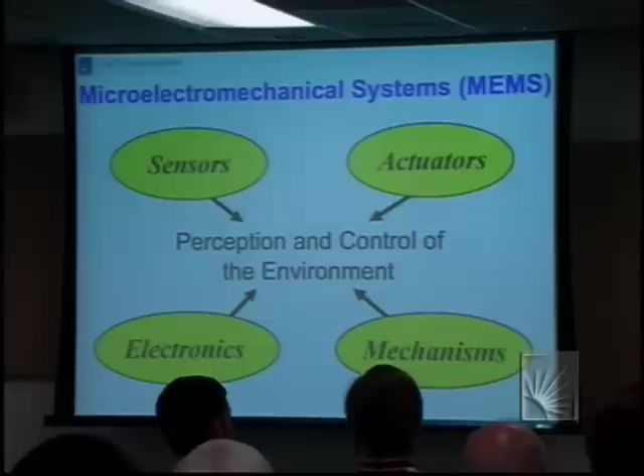Mechanisms is a special jargon word, if you will. A mechanism to a MEMS person is like a fulcrum or a lever—it's not the mechanisms that we in other fields use to describe reactions or theories or things of this sort.

Okay, well, here are perhaps two of the more successful MEMS actuators. I think the projector we're using today almost certainly will have this digital mirror device made by Texas Instruments. It's interesting—the person who pioneered this at Texas Instruments was a Case grad from our physics department.

I've been told many times by TI people that if they'd have known how much it would have cost to develop this device, they probably would not have embarked upon the development. It's now successful and they're making a profit, but estimates run that it costs between $500 million and $1 billion in development costs to develop this bit of hardware.

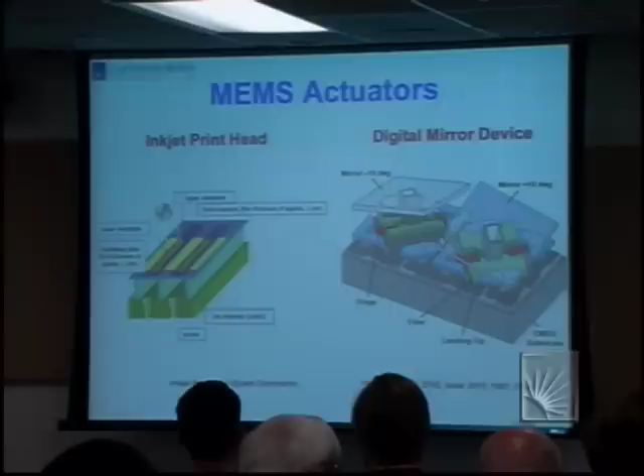It just fits on a chip. In terms of numbers, probably inkjet printers have the largest number of MEMS actuators around, and I'm sure most people in this room would have made use of that today. In terms of sensors, I've got two examples. Pressure sensors are probably the oldest MEMS device, the first MEMS device that became commercial. They're generally simple - there are various versions, but generally with a membrane, you measure capacitance changes, a very typical way.

I'll show this because it's incredibly important. The previous generations of accelerometers, which were used in the early days to activate airbags, were expensive and could only be available in the most expensive cars. It's when these at prices of $5 or $10 came on the market that they became standard in every automobile made. This must have occurred about 10 years ago.

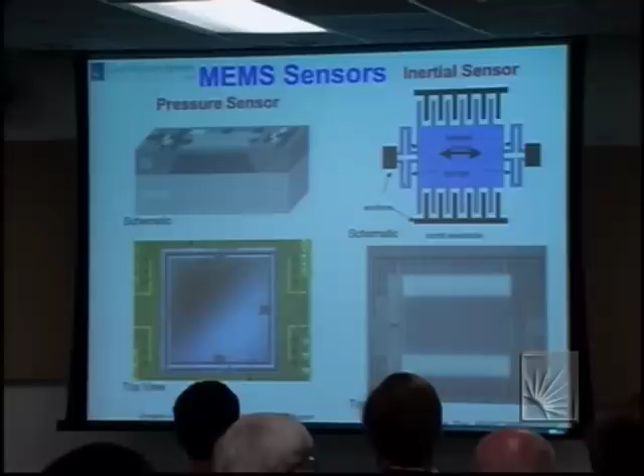I show this and go into a little detail because we're going to use the same type of electrostatic actuation in some of the MEMS devices we have fabricated.

Okay, so this is what I want to tell you about today. Residual stresses - LPCVD is an acronym for low pressure chemical vapor deposition. It's the workhorse tool to make polysilicon. Polysilicon is what MEMS types or electrical engineers will talk about, something that we in material science would call polycrystalline silicon, but the word poly or polysilicon has become so widely used, maybe you all know about it.

These are sometimes really nasty because residual stresses per se aren't bad, but residual stress gradients can be awful and can turn computer chips into something that looks like potato chips. And so we had to deal with that.

However, we found that we can make use of these residual stresses to allow on-chip mechanical testing, and I think that's a really neat development.

We discovered in the last few years - this is work that Joe Payer and I did - that there can be galvanic corrosion occurring during MEMS processing, and I don't believe the electrical engineers knew what galvanic corrosion was really, in the way material scientists know, and realized the detriments in a very standard MEMS processing technique. Okay, these are things I think we have helped the MEMS community with.

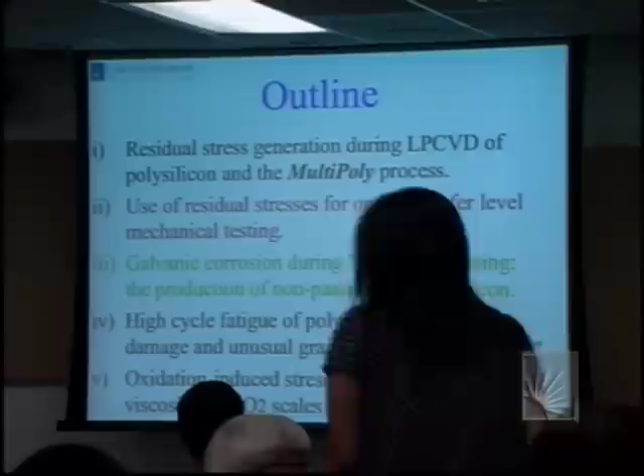And we've been able to use MEMS devices to study oxidation-induced stresses of silicon itself, and some surprising results on the viscosity of SiO2. So that's my outline. I hope I can get through everything in a reasonable time.

There are two types of so-called micromachining - this is again a jargon word. There's, as shown here, surface micromachining, which is an additive technique in that the silicon wafer is just a substrate which supports the device. Bulk micromachining is a subtractive technique - you take a silicon wafer and etch away in selective ways. I won't talk at all about bulk micromachining.

All the work we've done has been surface micromachining using the class 100 MFL just about 100 yards from here. But our devices have all been very simple, so-called single mask devices. We take a silicon wafer, we oxidize it - thermal oxidation to make a sacrificial oxide. Then this is the working bits of the unit.

It's, in this case, LPCVD of polysilicon - I'll tell you more about that in a moment. And then we put down about a micron of CVD oxide, plasma enhanced CVD now, and use this as a masking oxide. We have conventional photolithography and plasma etching, both for the SiO2 and the silicon.

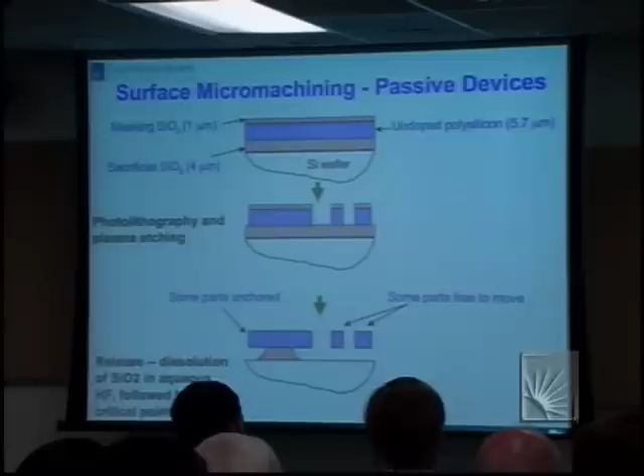And then this would be a cross-section of some device. Over time you use HF dissolution to remove the sacrificial oxide, and you depend on time release such that certain small scale features are floating and larger scale features are fixed, and this allows you to do all sorts of really clever device fabrication. Ours have been simple, but there's a degree of cleverness that I think we can claim.

Well, microstructures are something that material scientists generally think a lot about, and certainly much of my own research career over the years has been involved with thinking about structure property relations in materials, and polysilicon made for MEMS is no different.

If you ever have occasion to work in the MFL, you can do anything you want as long as it's something they've done before. That's fairly typical of any fab. They have very strict rules about what you can and cannot do. Any of you who go in the fab will know what I mean.

Our CVD reactor works in this temperature range of 540 to 620, and you can pick any temperature you like in that range, but not much else outside it. The reaction we use is just the cracking of silane under these conditions. It's inevitable and well known that films deposited under these conditions come down with residual stresses. These are growth or intrinsic stresses, since there's not any real thermal expansion mismatch stresses.

It's curious that at the low temperature end of the regime and at the high temperature end of the regime, the stresses are compressive and of significant magnitude, a few hundred megapascals. But in the intermediate temperature regime, the stresses are also significant, but opposite in sign, they're tensile. It's relatively straightforward to understand the origin of these stresses.

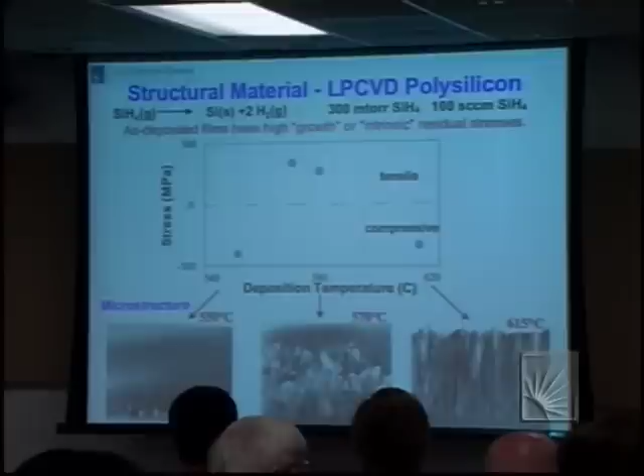You can see this at 570, where under the same growth conditions to allow a 5 micron film to form, about 80 or 90% of the film has crystallized. By the time you get to 615, crystallization is essentially instantaneous. There is no or very small amorphous region, and you get a very familiar columnar microstructure. Very many CVD deposition processes give rise to columnar microstructures. Essentially, you limit nucleation, and whatever nucleates early just continues to grow.

Now, the origin of these tensile stresses is easiest to understand. It arises because there's a small density difference between crystalline and amorphous silicon. Amorphous silicon is less dense than crystalline silicon, so when the material crystallizes, the structure would like to shrink, but it can't. It's essentially fixed. The material essentially doesn't support any plastic deformation at these temperatures, and the result is a tensile stress of significant magnitude.

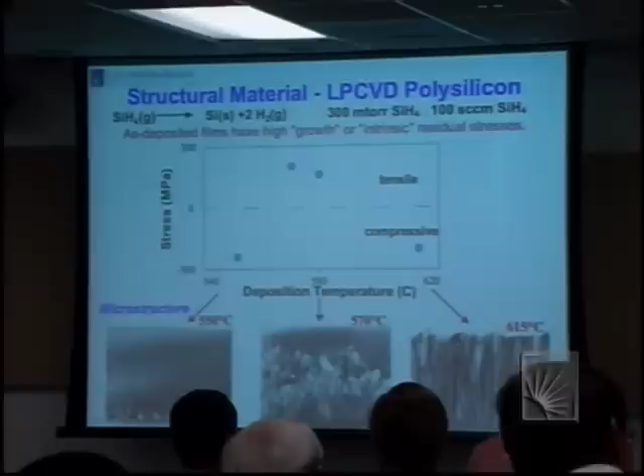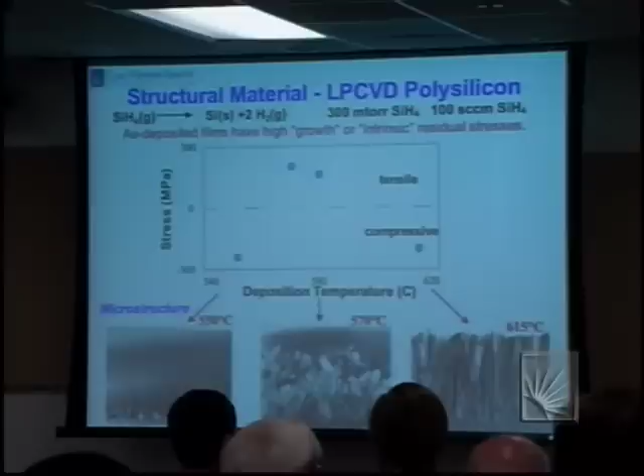At lower temperatures or at higher temperatures, the stress origin is different. It's not as well understood. It's almost certainly a consequence of a non-equilibrium interstitial population. Whether it's interstitial silicons or interstitial hydrogens, we don't know, but if you avoid these tensile stresses, then there's non-equilibrium structures here and here, which cause compressive stresses. Compressive stresses actually are the rule rather than the exception in many different types of CVD deposits.

Okay, well, these stresses can be relieved by high temperature annealing. This is the magnitude of a 550 and 615 deposit and the 570 deposit. If you anneal these, what you see is, let's talk about 570 first: tensile stresses first increase if you anneal at 615. This increase is due to that last bit of uncrystallized material, the last 20% crystallizing by this post-deposition heat treatment.

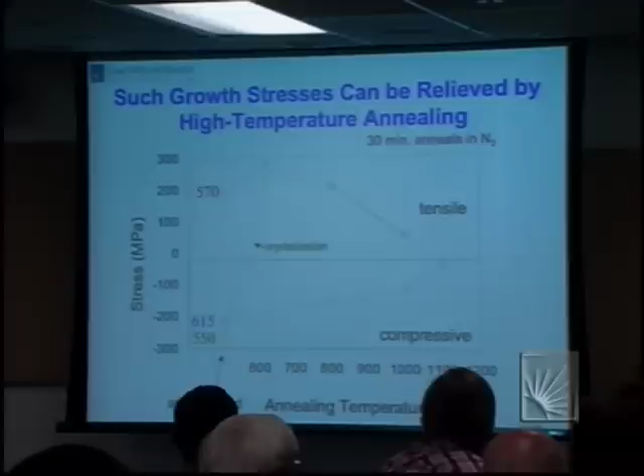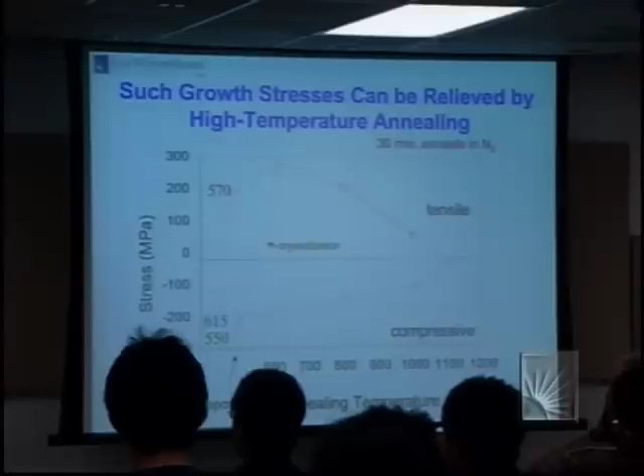Well, just anneal everything? The big deal is there generally are strict thermal budgets, and if you try to make a transistor, you have to be very careful of its structure, and you can't anneal at temperatures like this to get rid of these oftentimes annoying residual stresses. The result is MEMS designers do things completely backwards—they have to build the structure first and then the electronics afterwards. Oftentimes you'd like to build the electronics first and then build whatever structural sensor or actuator on top, so it imposes very awkward design rules. It would be nice if this kind of annealing didn't have to take place.

These are stress profiles of tensile stresses in deposited samples done at a range of thicknesses, deposited at 570 and annealed to crystallize the silicon, and this for compressive stresses. You'll see that it takes a fair bit of deposition until you get a steady state, and in both cases it's about 2 microns. It starts out that you have small residual stresses which increase to the steady state on the tensile side. Compressive stresses, the initial ones are large, and they decrease.

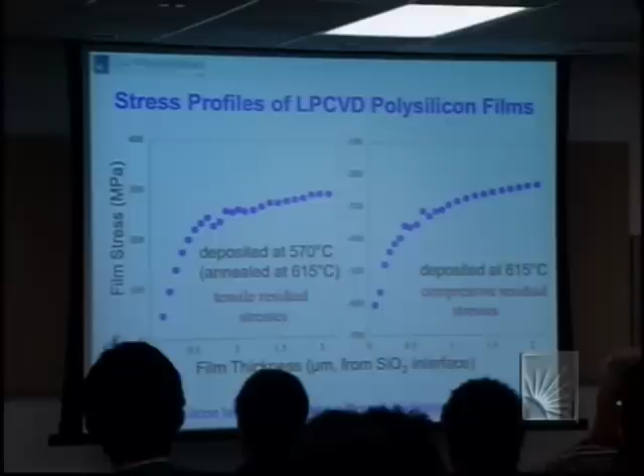In addition to this stress evolution, all these films have through-the-thickness stress gradients, and that's much more significant. These measurements of stresses represent average stresses as a function of thickness, but there are stress gradients in both kinds of films. We had the idea to do this experiment—maybe somebody could kill a bit of the lights.

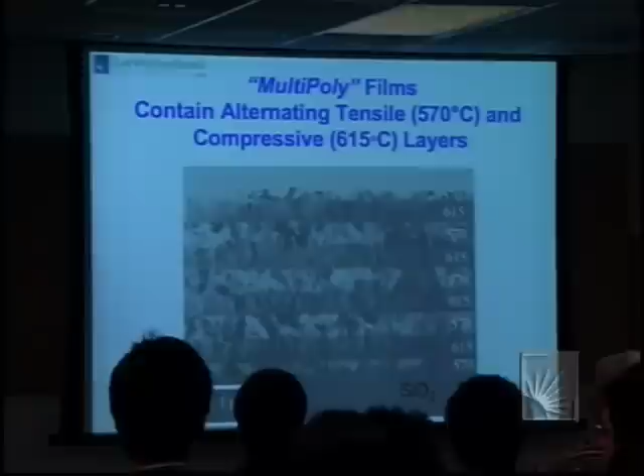So here is the SiO2 sacrificial oxide in which we build the structure. In this experiment, we deposited a thin layer, about half a micron, at 570, and at this thickness it remained amorphous during that brief deposition time. We then raised the temperature and went to 615. During the 615 deposition, the material deposited at 570 crystallized. Okay, so far? And now a miracle happened.

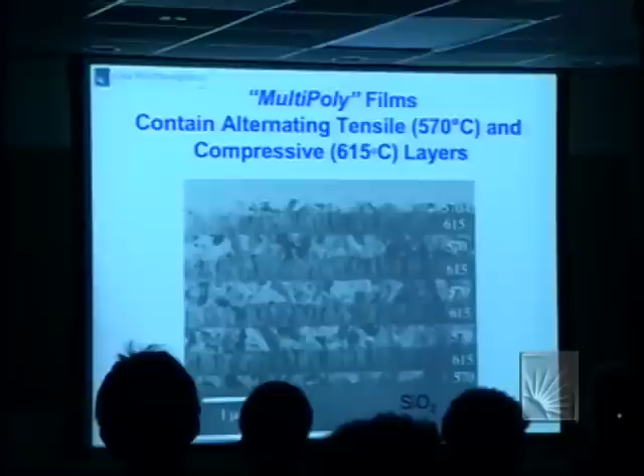We then changed the temperature again back to 570, and I would have guessed that this columnar structure would have continued to grow, because so many processes are dominated by nucleation issues, and having the columnar film available, you would have thought you'd avoid any further issues about nucleation. But that's not apparently the way it works. As I mentioned earlier, the kinetics of deposition are sufficiently rapid at this temperature that the atoms are not able, by surface diffusion, when deposited from the vapor phase onto the pre-existing columnar silicon, to move around until they find the correct equilibrium position to allow these columns to grow.

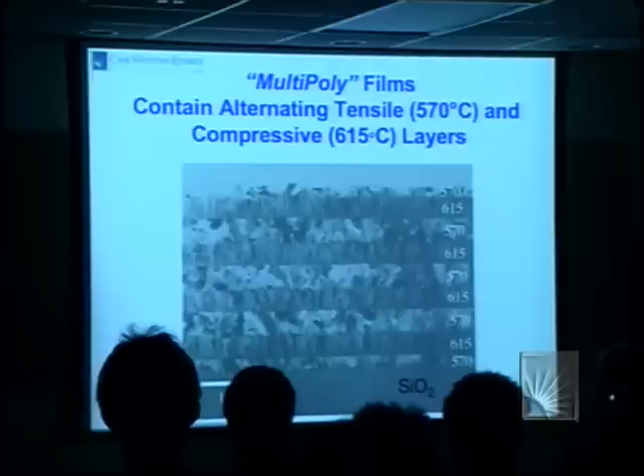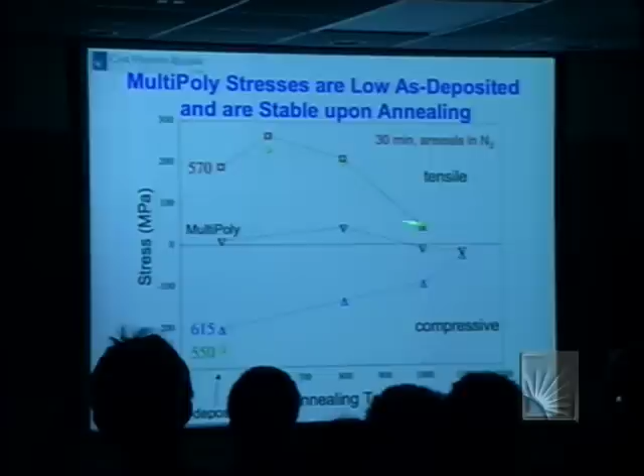And so this 570 film is amorphous and doesn't crystallize until you deposit the 615 layer, and so on. The final film was deposited at 570 and is then annealed at 615 to crystallize the last bit of material. In principle, this gives a way to control the stresses in the film. And of course, I wouldn't be telling you about it if it didn't work. Depending on how careful you are, you can make the as-deposited stresses as close to zero as you like, and these materials are pretty robust against further annealing.

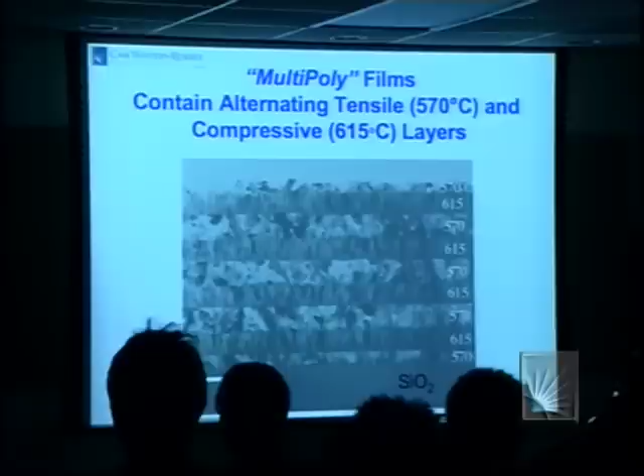Now, there are many ways to add up positive and negative numbers to come to zero—that's the easy part. I mentioned earlier that there are stress gradients in each of these films. So if you measure the stress gradients and then adjust to get to zero in just the right way, you can make films which have zero residual stresses overall and zero residual stress gradients. And that's really neat. But let me just say one thing before I get to that.

This columnar microstructure is rather rough on the scale we're talking about—the RMS roughness is 70 nanometers. There was, when we were doing this work, a lot of interest in optical MEMS. That bubble burst with the dot-com failure. But at this roughness, materials are too rough for any optical MEMS devices, so you have to go through a rather expensive planarization, which people would like to avoid.

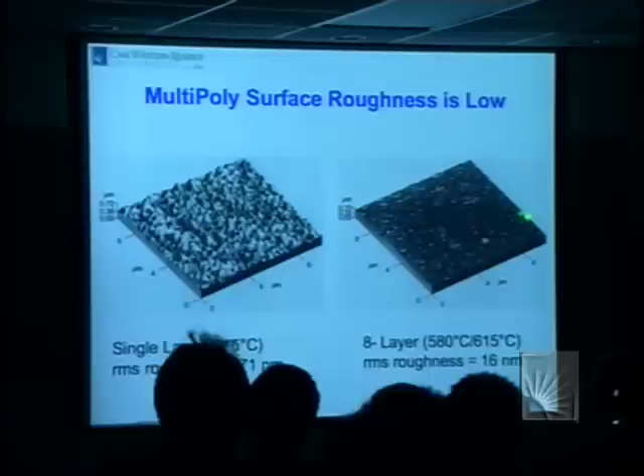Since you limit the extent of the columnar deposition through this alternating amorphous and crystalline material, the multi-poly surface has much improved surface roughness. But what's really important about this process is, as far as we can tell, we can make arbitrarily large devices which are flatter than we can measure.

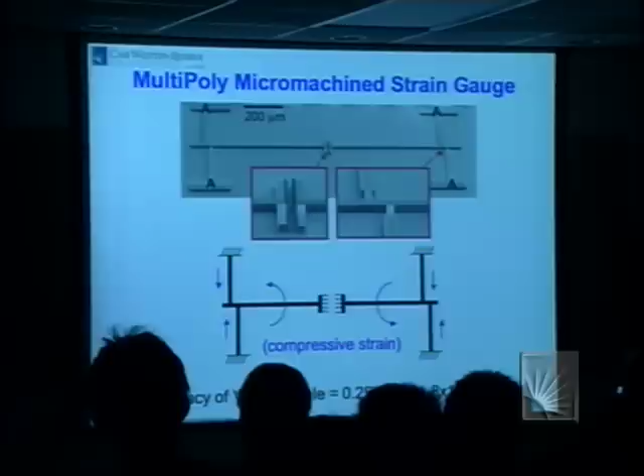I'll show you how this works later on, but it's an indication that you can make large, flat MEMS devices, and for certain applications, such as an accelerometer, a large proof mass is better - the larger the proof mass, the more accurate the accelerometer would be. There are other things you can do. We have enough understanding of the stresses and stress gradients that if we want to design a stress gradient, we can do that.

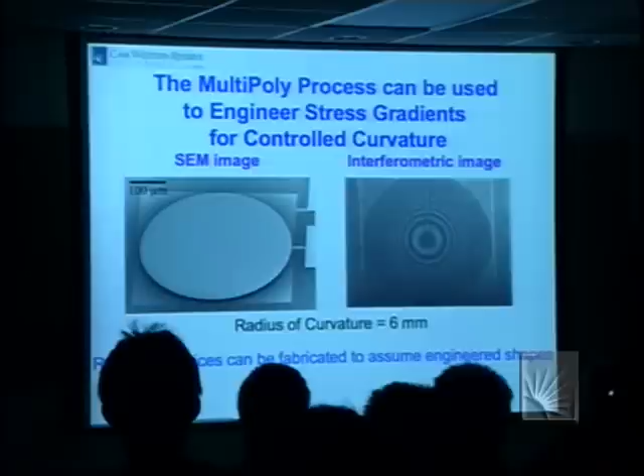This was an attempt to make a mirror for an optical MEMS device designed to have 6 millimeter radius of curvature, and it's perfectly circular, as you can see by these interference rings. This is really a nifty technology, I believe.

Okay, well, so I wanted to tell you about multi-poly. If any of you have need to make large, flat devices in the MEMS scale, or devices with controlled curvature, we know how to do that, and we even have some patents that should protect us.

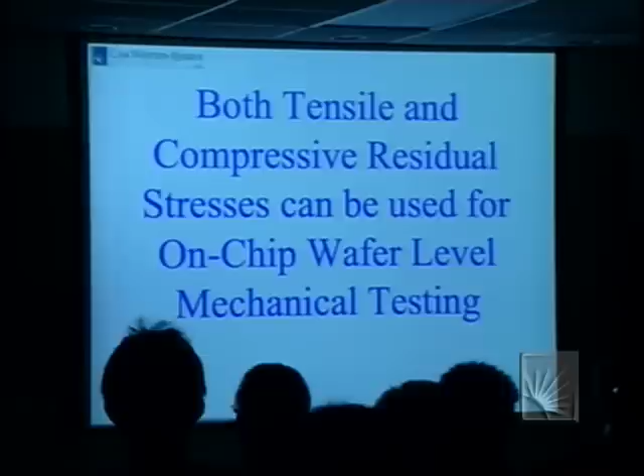But I've shown you a lot about tensile and compressive residual stresses. It would be nice if one could take a device and determine aspects of its mechanical behavior without having to build an ultra-small Instron testing machine or some other device like that at the microscale. Could we do it at the wafer level? And the answer is yes.

MEMS types talk about clamped-clamped beam. So this is a beam for which it's anchored here and here. And the way we did this, we built devices with varying micromachine notches. These don't have sharp notch tips - they're rounded, but nevertheless, there's stress concentrations.

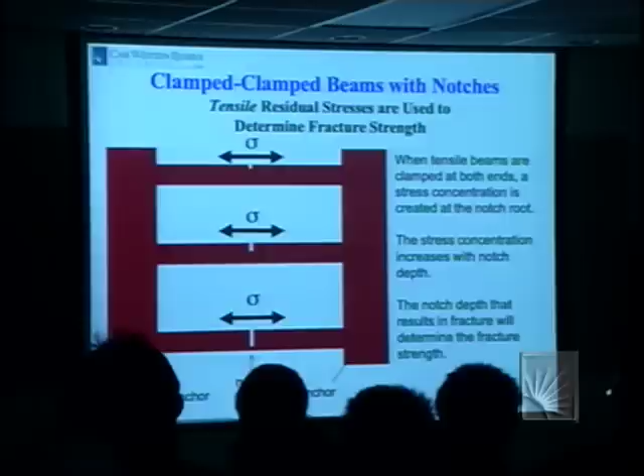And the way the measurement works, we build a device - we actually have a dozen or so of these beams with different notch depths, and we look to see which beams have fractured and which haven't. Those beams in which the stress concentration times the residual stress at the root of the notch is larger than the fracture strength will fail, and the shorter notches will not.

We made 14 devices. That's another thing about MEMS - you get statistics very, very easily. If you wanted to make 100 such devices and spend some time at a microscope just getting better and better statistics, it's not hard to do.

The strength, by the way, I should mention, is very sensitive - it's a brittle material, silicon at room temperature, and like any other good ceramic, its strength depends entirely on the magnitude, severity and number of defects at the surface, so-called Griffith flaws. In this case, the defects which cause failure are from the polysilicon reacting with the plasma etch. You don't get a perfectly smooth surface, and you can actually calculate the defects that cause failure, as I'll show you a bit later.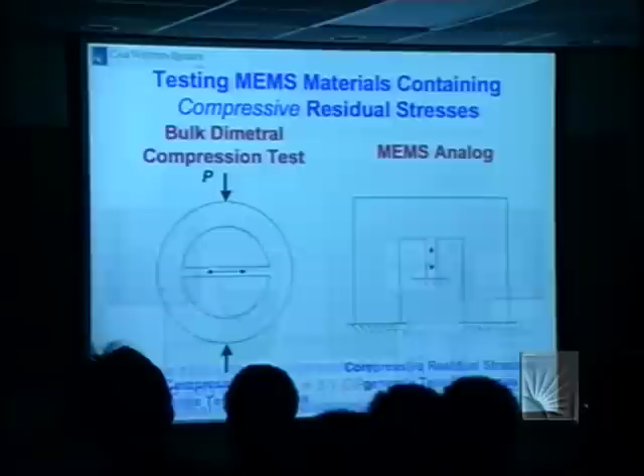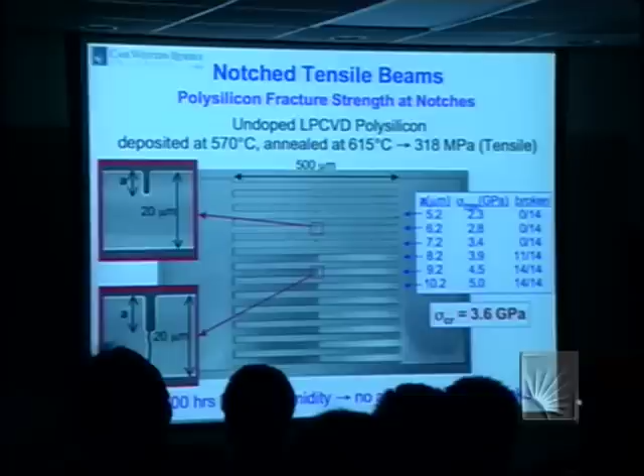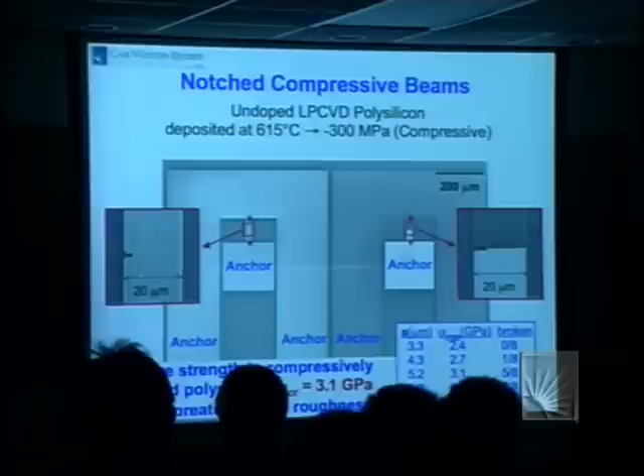This is our statistics. The strength is a little less than in tension, and the reason is, I'll just show you. This material is much smoother because it's an amorphous material that crystallizes. It's much smoother than the compressive material, and the difference between 3.1 and 3.6 GPa is just the difference in surface roughness between these two deposition temperatures.

Well, I've talked about strength, but anyone who takes Professor Lewandowski's class will learn that it's fracture toughness rather than fracture strength which is really important in determining the performance of a brittle material. To do that, you have to do sensible fracture mechanics testing, and we can do that as well.

So this is the same stuff I've told you before. But now what we do is, after we get to this stage, we actually put a Vickers indent, not in the device, but in the sacrificial oxide. It's an overloaded Vickers indent such that there's cracks coming out of the corners. These cracks propagate, and they propagate right up into the device. And then what we do is, prior to release...

We measure the crack length. Then we release the structure and look to see which devices failed and which didn't. That will be clear in the next slide.

I should mention, we almost always use critical point CO2 drying to make sure there are no capillarity stresses. The thing you desperately don't ever want to have in a MEMS device is have your floating device touch a substrate. It causes something called stiction, which is the end of the game. If any of your devices ever touch, it's over. So you really need to be very careful about capillarity-induced stresses at this stage of the process.

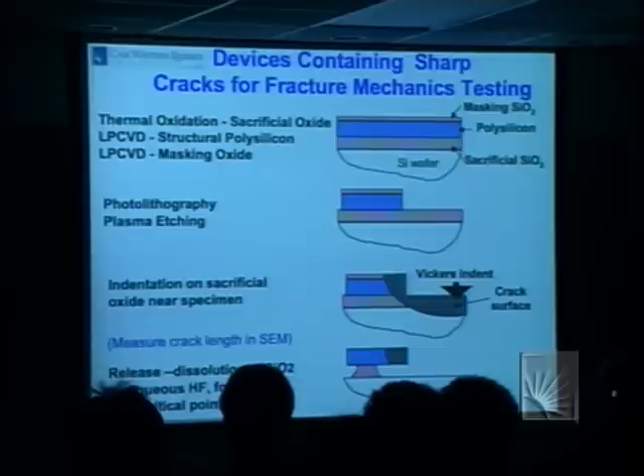So here's the schematic of the device. It's what I told you. It's this clamped beam. This is the oxide that's still anchoring the beam. Here's our test specimen. Here's the indent. There's a crack, and it ran through and into the material.

It's actually very hard in mechanics to do fixed grip testing. It's very easy to calculate stresses and other aspects of mechanics using fixed grip conditions, but it's hard to achieve them in practice. In this MEMS case, this is a perfect example of a fixed grips fracture mechanics specimen. So you can calculate what the stress intensity factor K1 is in this device, and then look to see which device has failed upon release and which didn't, and therefore you get this critical value of K1C.

Here is the device itself. It's a tensile bar. The indent is put in here, and this is the edge of the indent. This is still the sacrificial oxide. This is our device, it's here. This white feature is just some charging from the edge of the silicon tensile beam, and you measure this crack length, this distance, in the SEM before you release.

Here is our data. So we've done 3 different devices, 3 different wafers, with these levels of residual tensile stress.

These solid lines are calculated stress intensity factors for different crack lengths. The fact that they go through a maximum and then decrease just has to do with what happens to the stresses in this beam as the crack grows. That's a finite element calculation.

The blue symbols are devices that didn't fail, and the red ones fail. This is what we take the fracture toughness, K1C, to be upon release in aqueous HF solution.

It'd be very hard to get this measurement with this precision in any other way. It's interesting that there was one device of this length that didn't propagate to failure, and it's pretty clear that this crack propagated and then arrested as K fell below K1C, which is just what you'd expect in a fixed grip test.

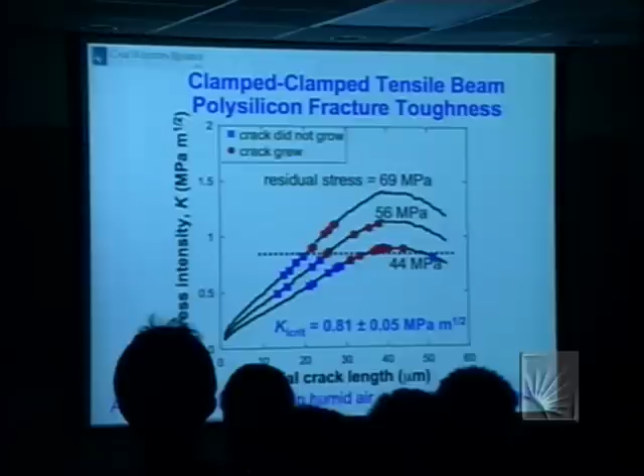The last of these things has to do with galvanic corrosion or anodic oxidation. We had gotten into an interesting dispute with a colleague at Berkeley on fatigue of polysilicon, and I think the community got a great deal of pleasure out of watching these two warhorses, me and my pal at Berkeley, whose name I don't have to mention here, duke it out. I think we won. Here's the issue.

At Berkeley, although there's a pretty good fab, they didn't use their fab. They sent their devices out to be manufactured at a fab in North Carolina, practicing what's called a multi-user MEMS process, MUMPS. And we made devices in our clean room across the way.

This is a cross-section of one of our devices, which had been released for 12 minutes in HF. You may wonder why I show this micrograph, because there's not much to see, and you'd be right, there's not much to see. There is a very thin passive native oxide, about 20 angstroms, and that's just what people expect to be on silicon released in HF. It's well known in the device industry and so on.

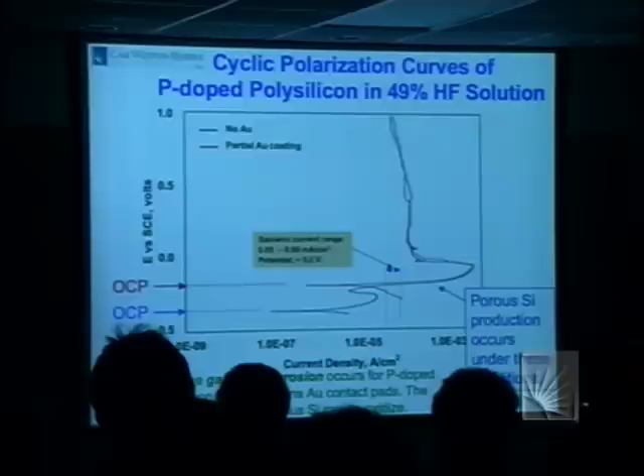There are enough surface steps, surface sites on porous silicon that there was hope you could get a direct conversion of electrons into photons. During that work, folks discovered that you could produce porous silicon electrochemically, if you worked in this current range, which is just the range occurring when we make this galvanic couple in an electrochemical cell.

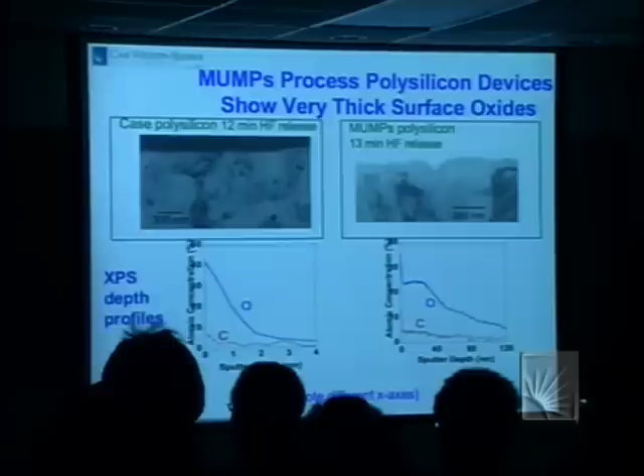The standard process steps in the MUMPs process: the very last step prior to release is to put gold contact pads on. Electrical engineers need to make electrical contact with their device, and what better thing to use than gold? Gold has been used forever for ICs and transistors, so naturally they put gold on there. And naturally, they've now gotten to a regime where silicon is no longer passivating.

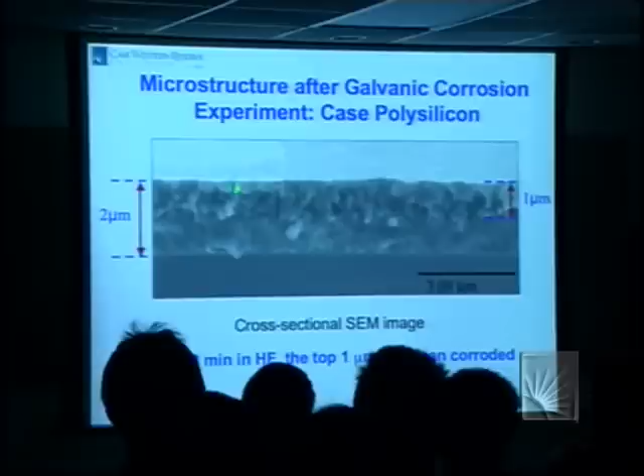We studied this in the SEM. This is a cross-section, the actual sample we used in this electrochemical experiment. There's been some corrosion in the top half of this 2-micron thick film.

So, caution: gold contacts may be dangerous to the health of your device.

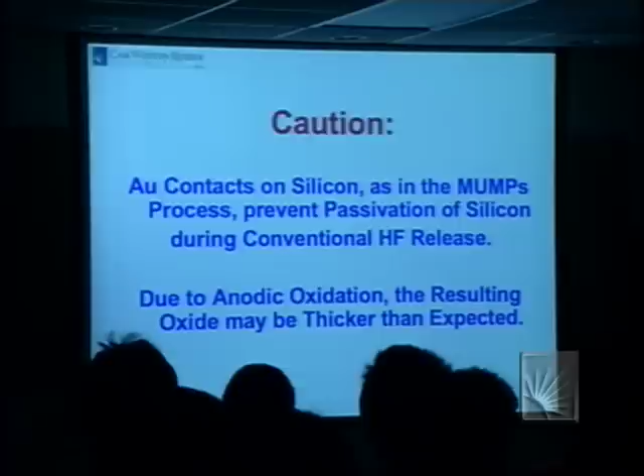We're also interested in active devices, and this is where MEMS allows folks like me to do experiments which wouldn't be possible by conventional means. This is the same kind of technology I told you about earlier, except here we need conducting, semiconducting silicon to do electrostatic actuation. I'll show you that in the next device.

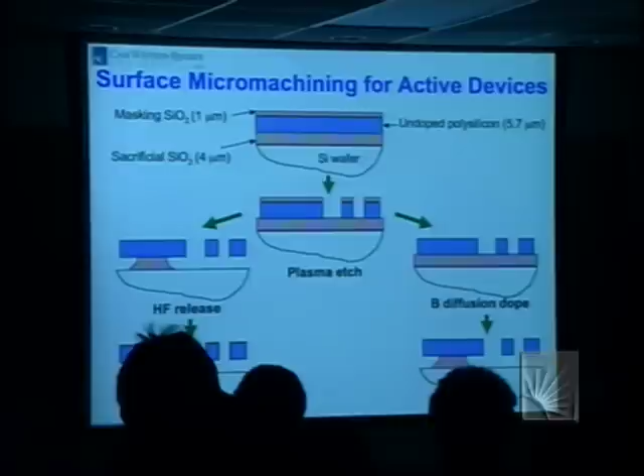You can do it either by, at this stage in device preparation, heating in a boron-containing source, the way you make transistors, or, for most of our devices, it was simpler to just sputter deposit a very thin film of palladium, which allowed the device to be sufficiently conducting.

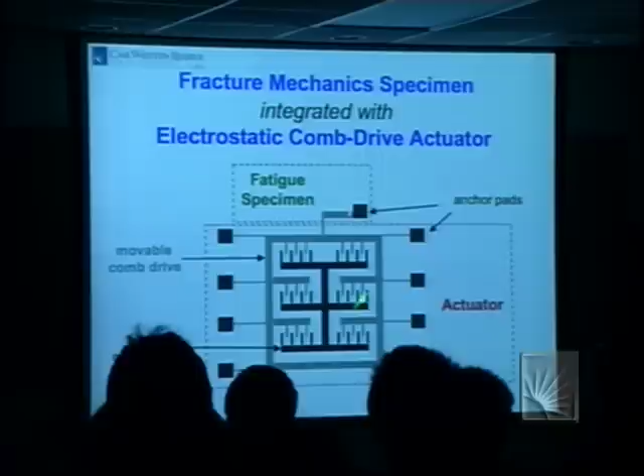This is the type of device: we use the same sort of interdigitating comb fingers that are used in the accelerometer in your car. When you apply voltage between these black and gray regions, this device will move downwards as shown here, and this is our fracture mechanics sample.

This is a close-up. It was actually a significant development challenge to make these devices, which had 1,438 pairs of comb fingers. If you're not calibrated, 0.8 of a millinewton may not seem like a large force, but it's a very large force at the microscale or nanoscale.

We measure the movement using this vernier and calculate the actual stresses by finite element analysis. The important thing I show in these two devices—this is mostly the device we use—is that it creates a tensile stress at this region of this micromachine notch.

But we can turn this upside down, and this allows us to... so how do we work this device? We put this device in resonance, and its resonant frequency is about 10 kilohertz. Then we simply increase the amplitude of the AC voltage until we get failure, if we wanted to do a short-term test.

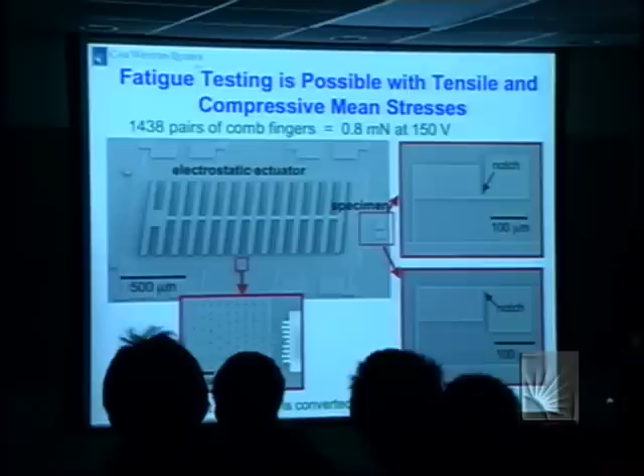But if we combine a DC bias with the AC alternating voltage, we can do experiments with mean stresses, which turns out to be very useful in the experiment I'm going to show you. Essentially it would be impossible to do an experiment on a brittle material like silicon with both mean stresses and alternating stresses, but DC and AC biases make this relatively straightforward.

What people who do fatigue like to measure are SN curves. SN simply means the stress of the alternating cycles versus the cycles to failure. This is, as far as I know, the first SN curves we produced—Kahn, Ballarini, Mullen, and myself—in a quite prestigious journal. You can see there's some noise here; these were early experiments.

But it's very clear that the short-term strength of this batch of silicon was about 5 gigapascals, and by the time you got out to a stress of 2.5 GPa, the cycles to failure were 10 to the 9th. By the way, this is in the regime called very high cycle fatigue.

Again, it would be very hard to do this in a conventional Instron machine. Graduate students would be grandfathers before they finished their PhDs if they had to wait for 10 to the 9th cycles.

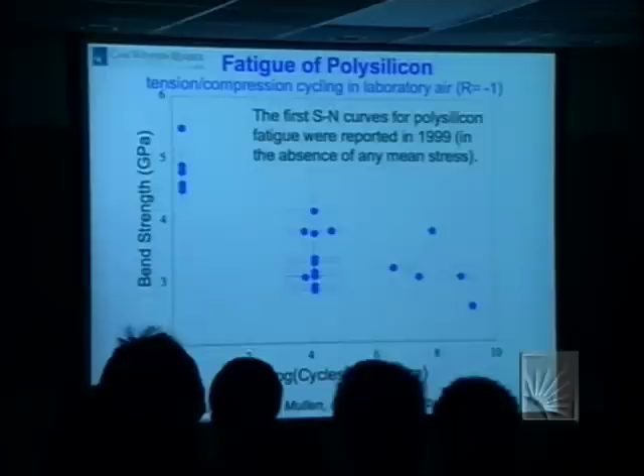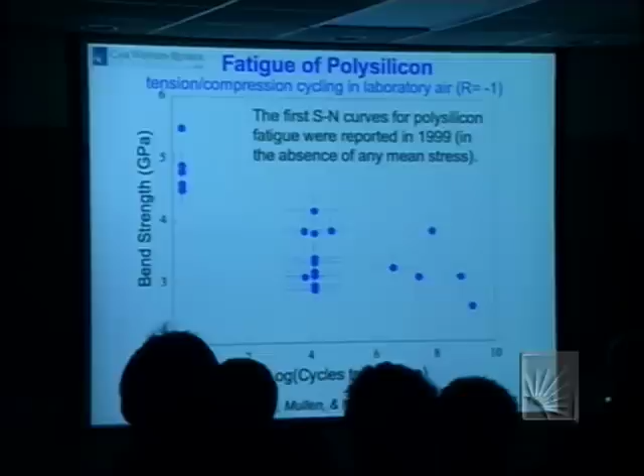These tests were done without any mean stress. For those of you not familiar with this jargon, R-1 simply means that the magnitude of the tensile and compressive stresses were equal. If you have tensile zero, that would be R0, and so on. But we had equal compressive. And we assume, of course, that failure occurred on the tensile part of the cycle for brittle material.

And to understand why, what was causing failure at the lower stresses at the longer times.

So we resorted to a ceramic trick, well known mostly in the glass field. When you look at a fracture surface, what you invariably find for brittle material is a failure point, and then a region where you get a very flat fracture surface, called a fracture mirror. There's a well-established relation between the size of the flaw and the size of the fracture mirror. Essentially, the size of the fracture mirror relates to where the crack velocity gets to the speed of sound, and the crack is still accelerating, so you get a rough surface because of subsidiary fractures ahead of the main fracture. At high stresses, there was a much smaller fracture mirror, and therefore a smaller fracture origin, than at lower stresses, where there's a larger mirror.

So the implication, very clearly, is that there's some flaw, and it's growing subcritically. The flaw present is not large, not severe enough to cause fracture at this stress, and you have to wait until the flaw grows. There's an inverse relationship between the fracture strength and the size of the flaw - the larger the flaw, the smaller the strength. So there must be some mechanical damage.

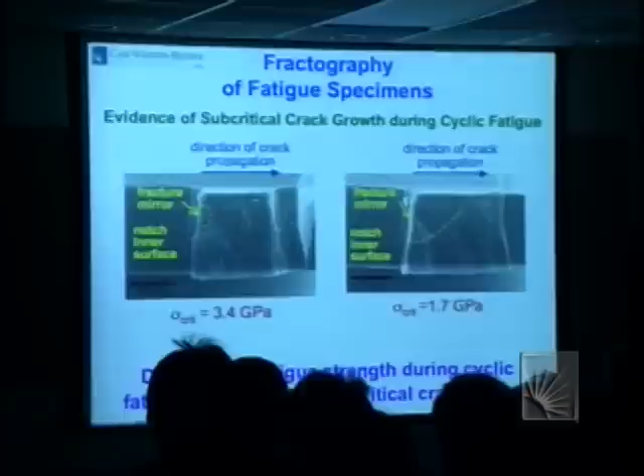It's peculiar, because this kind of behavior is well known in oxide ceramics or oxide glasses, where it's very clear that you get subcritical crack growth due to a form of stress corrosion - a crack in the presence of water vapor, which is almost always around us, can fail subcritically, and the crack will slowly grow due to this stress corrosion cracking. But silicon is immune to this kind of thing. As far as we know, there's no evidence that the strength of silicon is sensitive to the presence of moisture, either liquid water or atmospheric moisture - very different from oxide ceramics and oxide glasses.

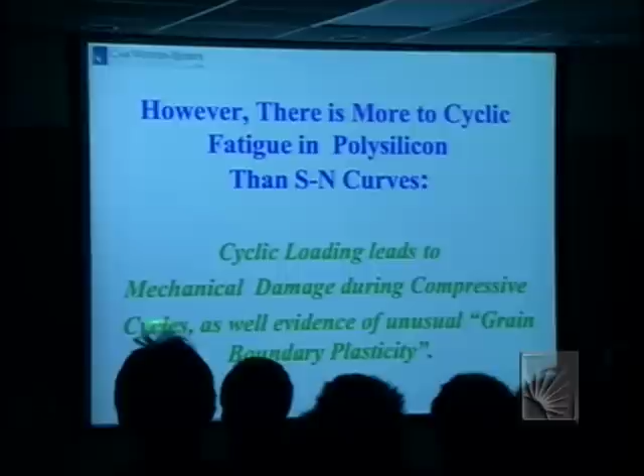Well, there's more to cyclic fatigue than just SN curves. I'm going to show you further evidence for mechanical damage during these compressive cycles, as well as some unusual grain boundary plasticity.

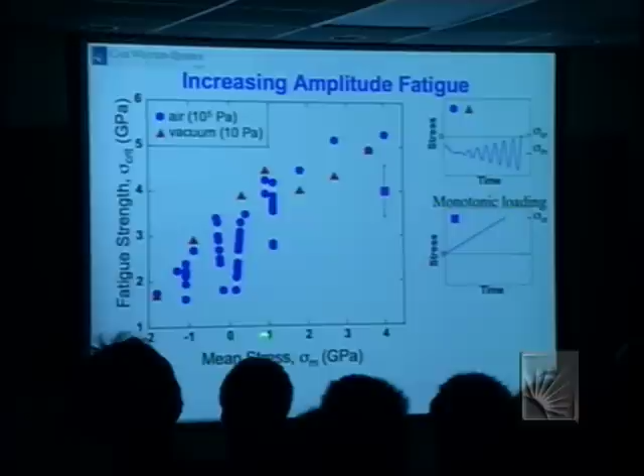So what we're able to do with our devices is impose mean stresses of varying sign and magnitude. The way we do this experiment is we impose a mean stress, and then we increase the amplitude of the AC voltage until we get failure. So we impose a DC bias, and then we assume that failure occurred at the maximum of the tensile part of the stress. When we compare this with monotonic loading - that's the value of the monotonic stress, about 4 GPa - you see there's a dramatic weakening with large negative mean stresses.

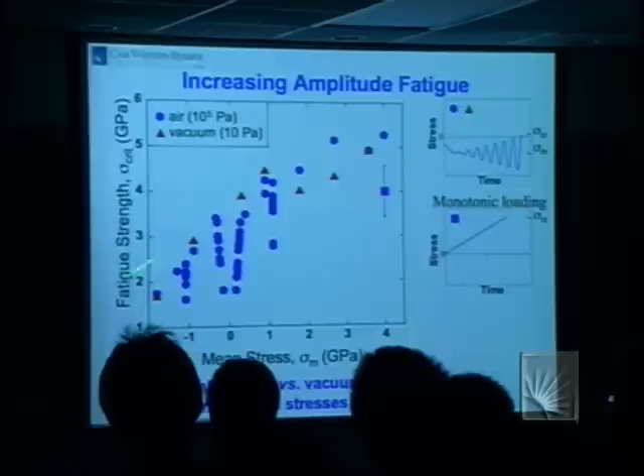Our interpretation is that there must be asperities on the sample surface, and we're driving two asperities together, causing some mechanical damage. This is not sensitive to environment - we've shown experiments in air and at 10 pascals pressure. Contrary to lots of people's intuition, compressive stresses can be very damaging. We normally think compressive stresses in brittle materials are good, because they fail under tension. This is an example - high cycle fatigue with mean stresses - where it's not so good.

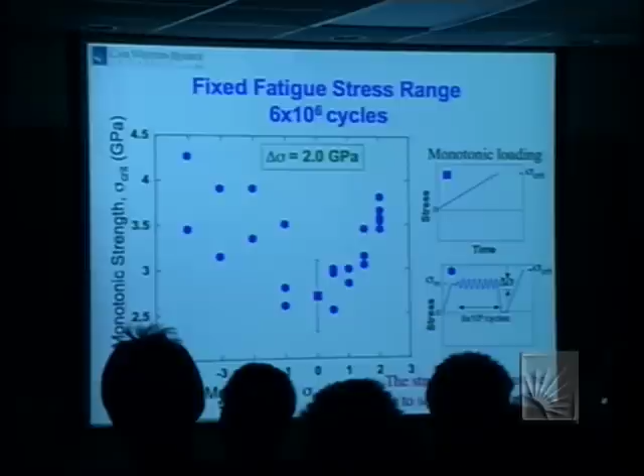At large compressive mean stresses or large tensile mean stresses—we fixed this delta sigma at 2 GPa—at large values of the mean stress, we got strengthening. There must be some form of plasticity. We know there's almost no example of plasticity in silicon until you get to temperatures of about 600, 700, 800 degrees. The next two slides are speculative, but there's been some recent calculations by a well-known theorist, Adrian Sutton.

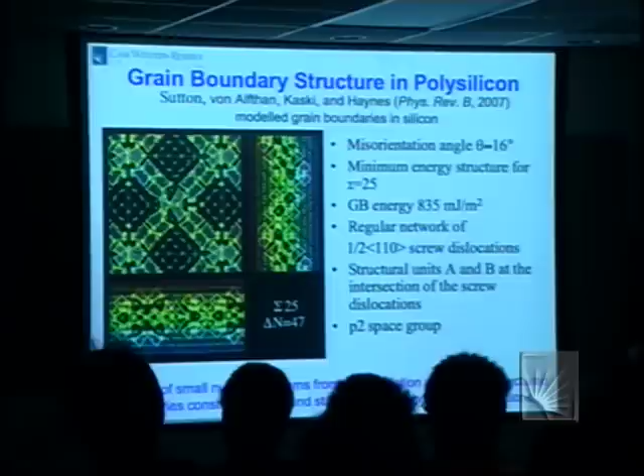The details of his calculations aren't important, but he showed that when you make silicon grain boundaries of any misorientation, from zero over the whole range of misorientations, the boundaries are not just an amorphous melange, but are structured. The structures have these A units and B units, which refer to specific arrangements of silicon atoms in the grain boundaries, and the proportions of A to B change with misorientation.

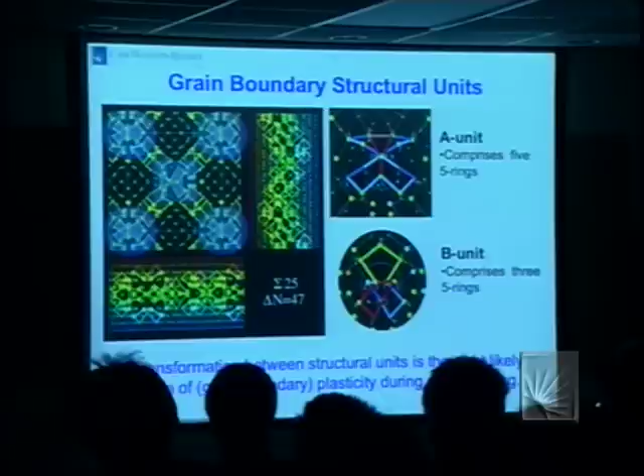It's entirely possible for very small motions of atoms in the grain boundaries to cause an A unit to irreversibly transform into a B unit. If that happens, that is effectively a form of grain boundary plasticity. Any plastic deformation causes a small change in shape, and if you change A units to B units, that's what you get. We suggest this must be the origin of what we've observed.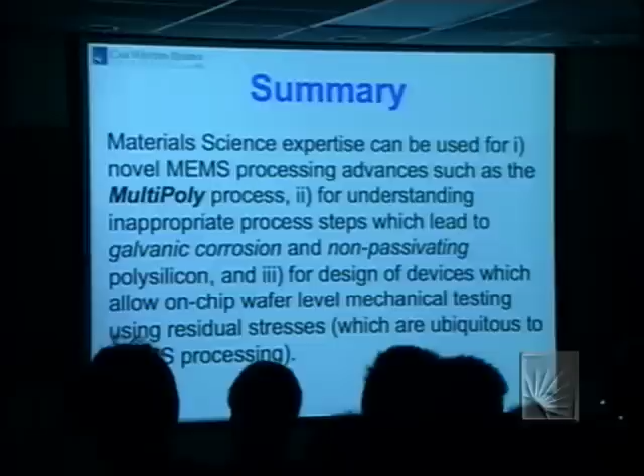I see my time is up—I was too ambitious. Let me just summarize. I've told you a few things about various aspects of residual stress in electrochemistry. I think material scientists have made and can continue to make important contributions. I've told you about this mechanical damage during high cycle fatigue. I didn't tell you about items 2 and 3—very interesting, but if any of you are interested, we can talk offline. Thank you very much.

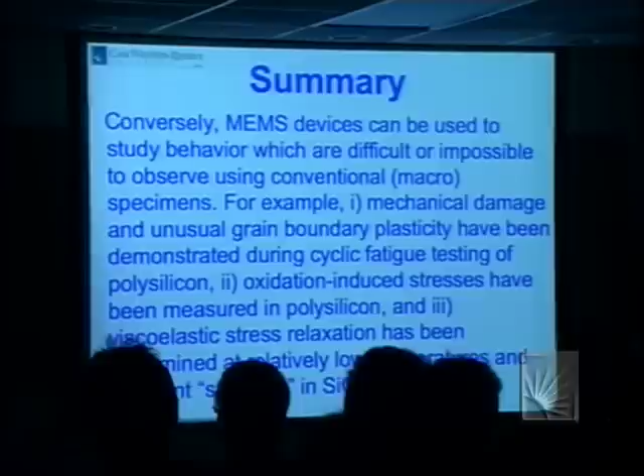Can you make your layered structure alternating between the 550 and 615? Yep.

When you put down a layer and anneal at 615, why doesn't the previous layer that was annealed at 550 see that and continue to change structure? Temperatures are too low to do anything but crystallize.

I didn't show you, but when you anneal to 1000 C, you essentially wipe out that layer structure by grain growth. But at these low temperatures at which we're doing the deposition, the only thing that can happen is either you get crystalline growth or amorphous material that crystallizes. There's no other microstructural changes possible at these relatively low temperatures for silicon.

Yes? I have a very simple-minded question. Those are always the toughest. I looked at those multi-layer depositions, and it struck me that the depth or height of the different layers was different. In my mind, this is so because you adjust the height of the layers.